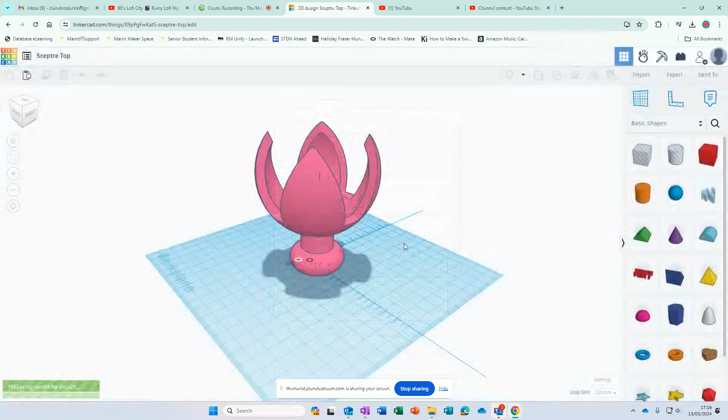So what's happening now is it's downloading that into my downloads folder. Once it's downloaded, you're going to open up the FlashPrint 5 software. What you're seeing here, this is actually the print bed. Down here is the base of the printer, and this is how much space you have above the printer that it can print in.

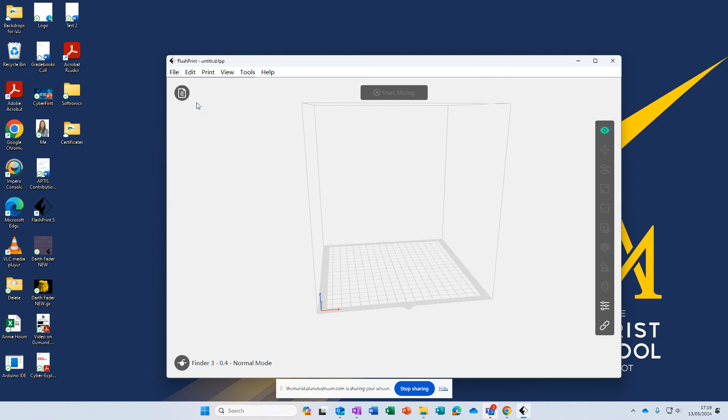We are going to load the file that's just downloaded, which is our Sceptre top. And you can see it's there, it fits perfectly, not too big.

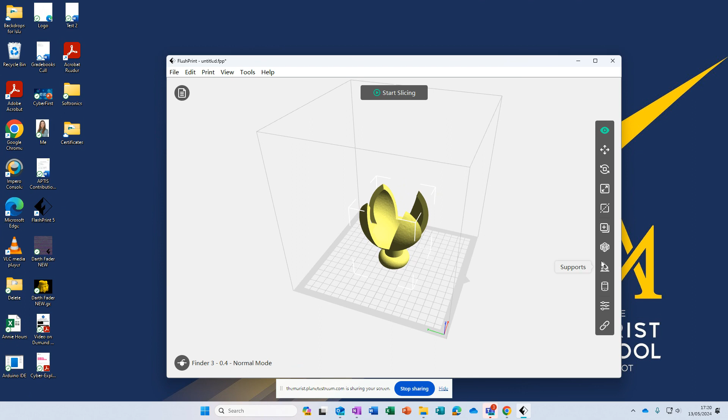Now the only problem here is if it prints just as it is, you're going to lose all of these bits, they'll just fall down because I've got nothing to support them. So on the right here, there's all sorts of different things you can do. If you found it was too small, you could scale it, etc. But what I'm looking for is the supports one, and I would do this with virtually every design.

I would just double check this. There are two different types of supports. You've got these little ones like trees, or you have got these ones which look like little lines, and they break off really easily. So I'm going to just say auto supports, which will automatically add these supports for me.

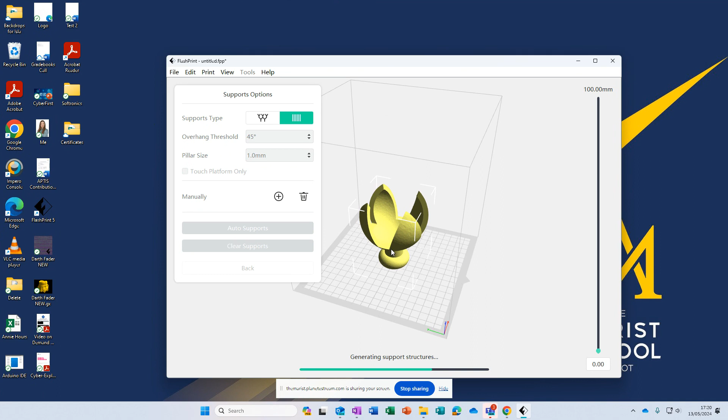So once those have been added, click back. Now, did you see the orange bit? Those are the supports, all of this that's been added. These will just be bits you'll be able to break off your design. Once it's printed, they break off really easily.

Once you've added your supports, you're ready to slice. So you're going to tell the computer when to slice. It brings up this options menu. The only thing I ever change is this one called the raft.

This is the bit at the very bottom of the design which helps hold it to the print bed. Because of the design I'm making, I'm just going to lower this down to 3 millimeters, and I'm going to say yes, there is a raft. Sorry, I was wrong in saying it's the only one.

The other one I use is this infill. You can actually change the shape of what goes inside. So in a second, I'm going to show you. I think hexagon is the best - it doesn't use too much plastic, but it's also very solid.

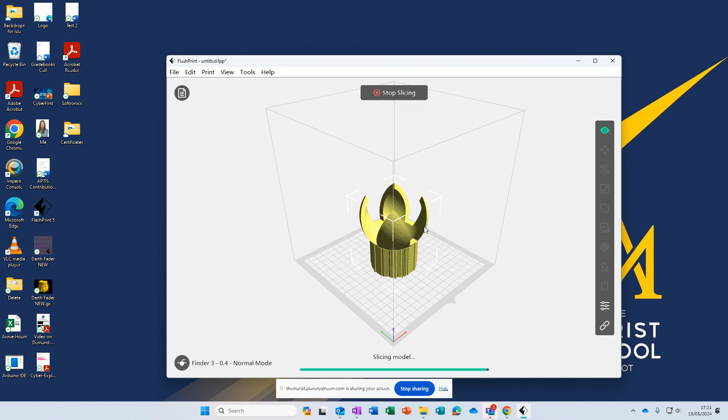And I'm going to go ahead now that I haven't changed anything else. I'm now going to go ahead and slice. What happens then is the computer goes through and decides what's going to go on each layer all the way up here. And once we're done, you can actually go to slice preview.

Now see this little gold bit here? This is the actual print head.

What I'm going to do for you is just go through these different layers. So if you remember, I said there was going to be that honeycomb hexagon shape. That's what these yellow bits are, they're just to hold the inside shape.

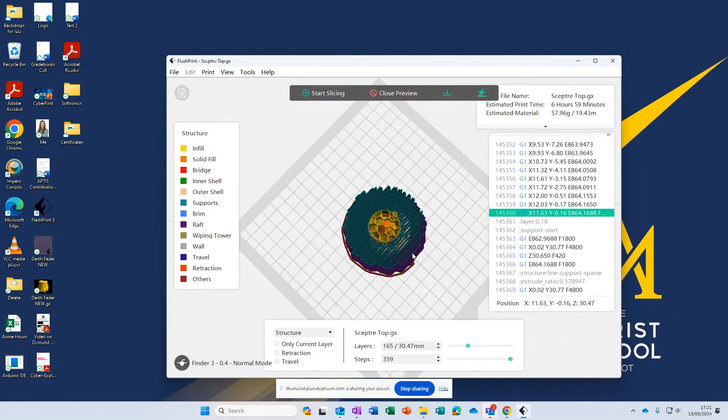I'm going to scroll all the way down, so you can see there again the hexagon. This blue bit here, this is the bit I said, these are the supports. These are the bits that will break off really easily later, and they don't use too much plastic either.

Scrolling down further, this purple bit, this layer, and this layer two - let's just go up a layer manually like that. All those purple layers there, so that's 5 layers. They are all the raft, which is going to help stick this design down onto the print bed.

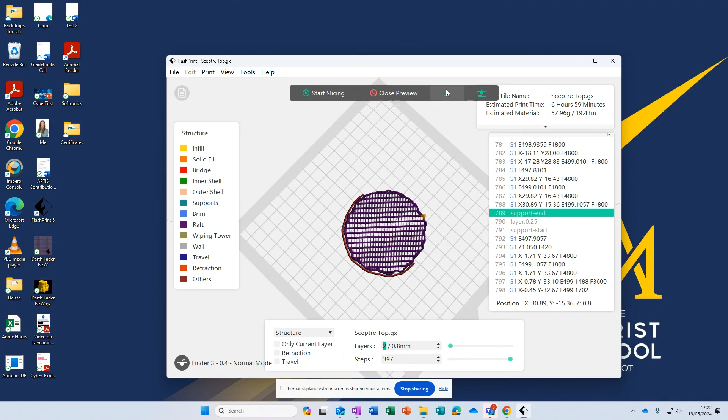Once you're happy with the way that is, you're going to hit this download button. You're going to save it into your downloads folder, and it's going to be a GX file, so make sure it's well named. Once you've downloaded it, you need to copy and paste that onto a flash drive or a memory stick, and you're going to transfer it over to the printer.